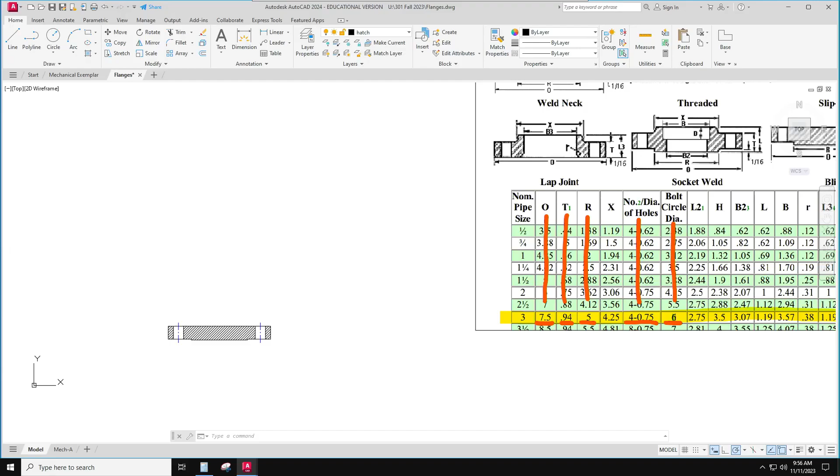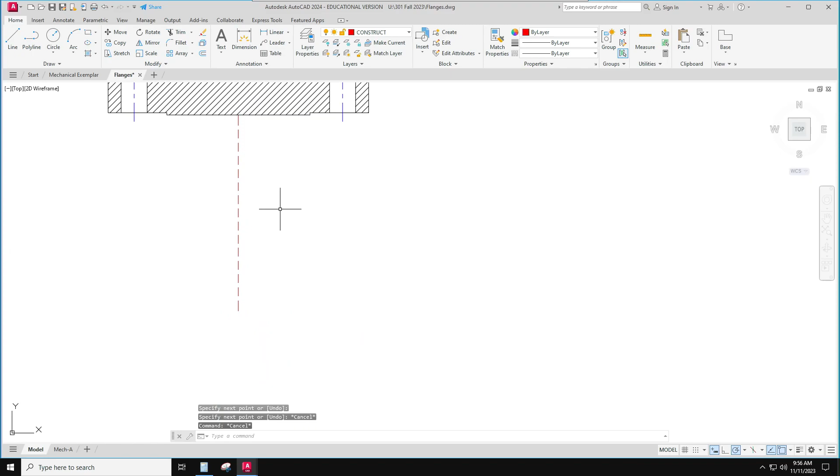Okay, the next step is to make our front view of this. Oops, let's get that to work there. And so I'm going to use some construction lines and things to do that. I know that it's going to be a circle because the flange is round. So I'm going to come down here and I'm going to make it so I can draw the circle, and I'm going to just give some lines that'll help me line things up. These are called construction lines, and it will help me line things up as I draw.

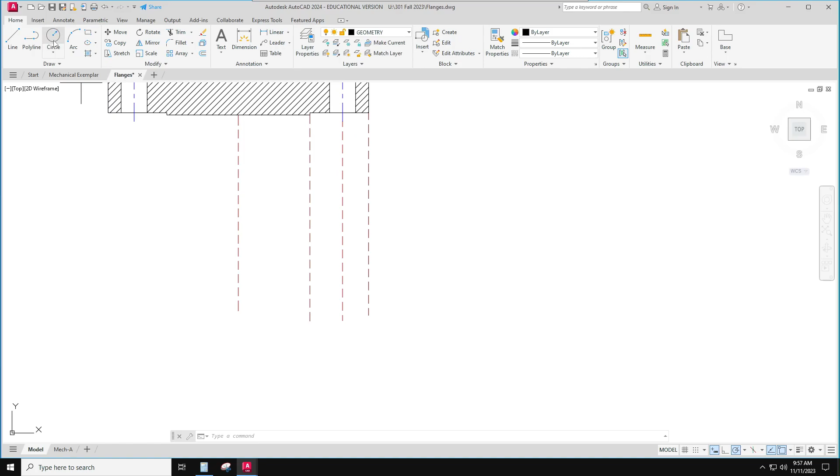Okay, so I know there's an outside diameter, so I'm going to use a center radius from here straight out. That looks pretty good. It's my outside diameter. And then there's this raised face diameter here in the middle. And there's going to be 4 holes on that bolt circle. So let me do my center line one to go out to here.

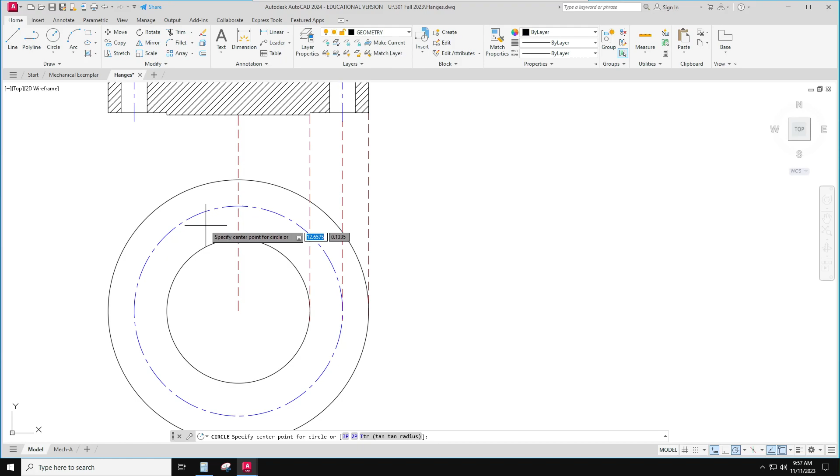And then usually these holes have to line up here. Not usually, always, they have to. And I know that those are a 0.75 diameter, so I'll use center diameter right here. That's where they connect, and type in 0.75 for the diameter. And I know that there's 4 of those.

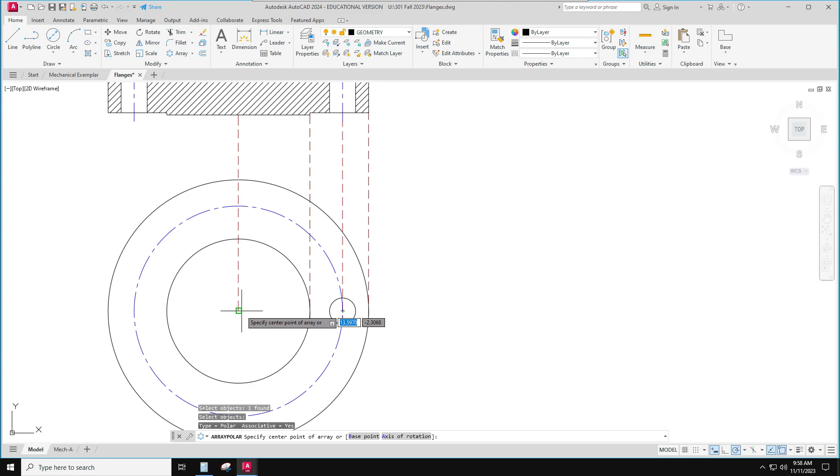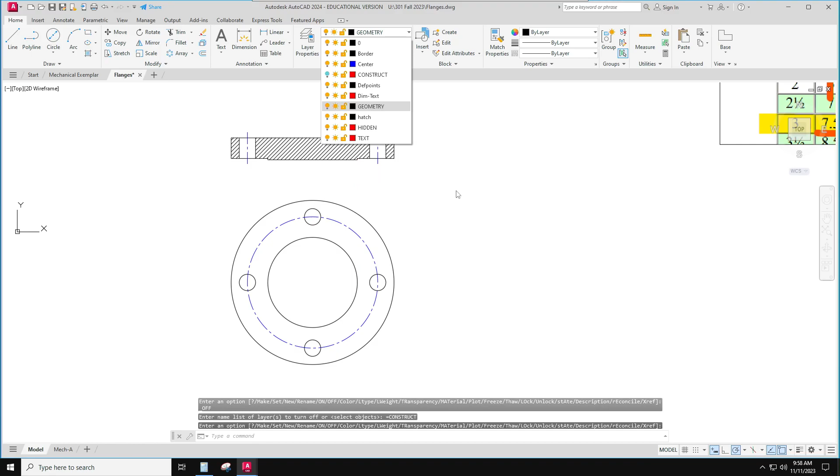So I can either copy them into place, or I can use the array command. I'm going to do a polar array of my hole. Enter, find the center, click, and go up and say that I want 4 of them. And now when I turn off my construction layer, I have my section view, and I have my front view.

So you're going to do that process for 3 different flanges. You're just going to draw them all right next to each other. You know, one here, and then you can make another one over here, and another one over here. And it wouldn't hurt to put a little text below so that you know which one is which.

So I'll put on my text layer, DT middle center. I'll put the middle center of my text about here, and I'll make it 0.25 tall. And this one is blind. That way I know that this is my blind flange.

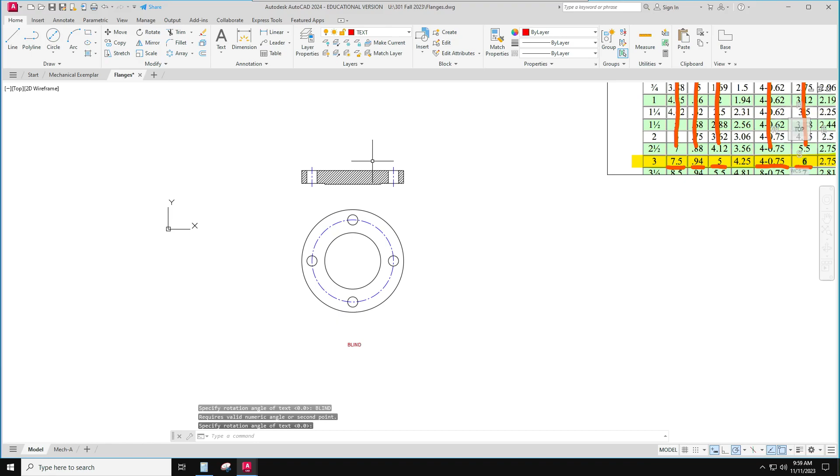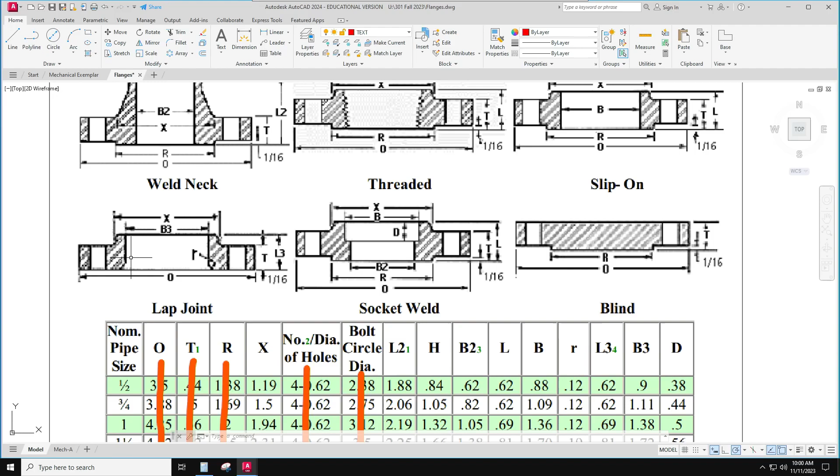So your job, after you've done the first one, is to go do the same thing for your slip-on. It looks exactly the same, but there's 1 extra hole in it. And then you'll do the same thing for your lap joint, and it looks almost the same. It's the same, and then there's this little thing on the back, right? So you can start with a copy of your blind flange and just add the new lines required for the slip-on, and add new lines required for the lap joint.

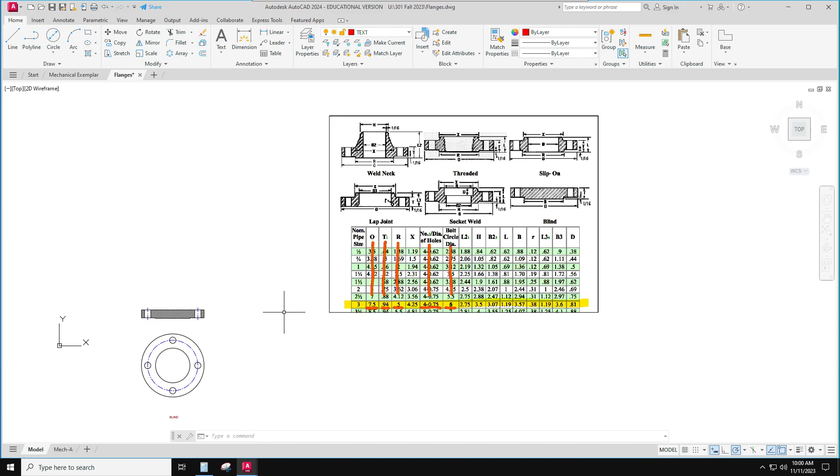Okay, and you can find all the information. Here are the dimensions that you would look up in the chart. That's an R, that's an L3, that's a 1/16. Okay, so that's your next step, is to draw the other 2 flanges.